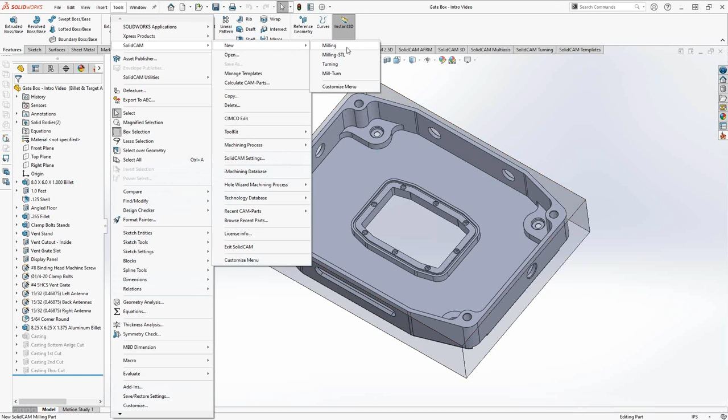If you are doing any kind of turning or mill turn part, then look in the rest of the series of videos for the new turning or mill turn part setup. So let's click on milling.

What this will do is bring up our first window from SolidCAM on the left side, where we're choosing between external and internal. Now, these settings here are defaulted according to our SolidCAM settings, which was covered in a previous video in this series.

So external versus internal - essentially what you're doing here is telling SolidCAM what your relationship with the original SOLIDWORKS part file is going to be.

So if we selected internal, what we're actually doing is adding a folder to this SolidWorks part. It's still the same file we're working in, the original SolidWorks part file, but we're adding a folder to the feature tree that would have all our tool definitions, operation definitions, everything to do with the actual programming side of things.

And the purpose of the internal option is really just for file management. If you've got a Vault software or PDM or anything like that where you are checking files in and out of some sort of network location, or maybe you just have a simple network and want to control just one file internally without some sort of third-party program, then internal is essentially for that purpose.

It really just allows you to do the design and the program in one file, and you can move that file around wherever you need to. That does mean that anyone who uses SOLIDWORKS can open up that same file, but if they don't have SolidCAM, then they won't be able to look at the programming side of things.

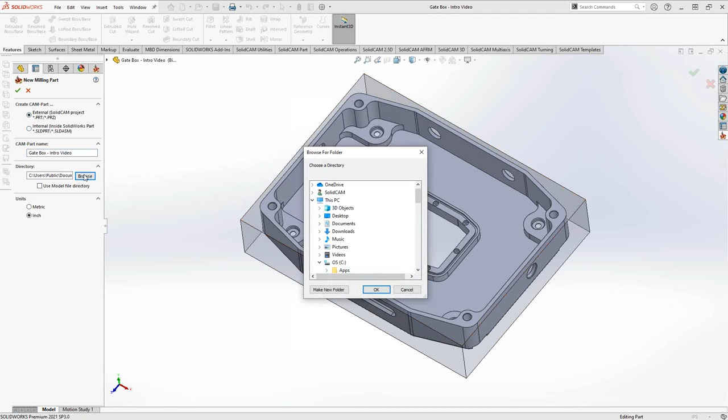If I want to skip the step of having to find where the original SolidWorks model was, I could just check this box here, which is why I had it defaulted, and it saves the SolidCAM file side by side with the SolidWorks file. That eliminates the need to browse to where I found that file. If I want those two files to be side by side, let's say in a job folder or something like that, this gives me the ability to just skip the step and say put it wherever I found it from the original SolidWorks model.

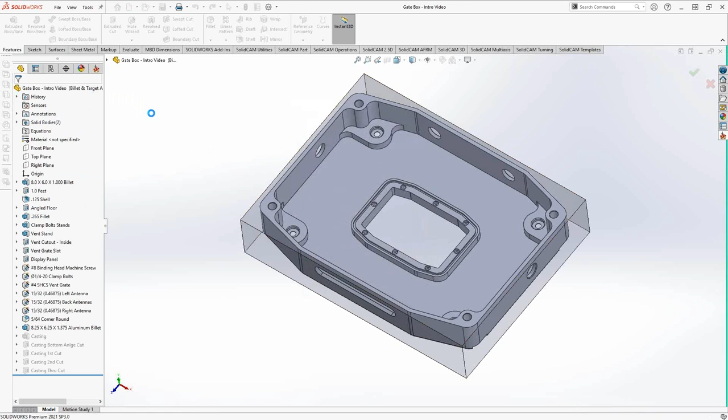And then lastly, it defaults to inch units, but it wouldn't matter if the original model was in metric. Once you open up a SolidCAM external file, you work in the units that you'd like to work in. So I'm just going to click the green check mark, and what will happen is it'll close this original SolidWorks model and open up a copy of that model inside of this new assembly. So essentially, you'll see that we're not actually leaving SolidWorks, we're just opening up a new file. This is technically a SolidCAM file, but because the functionality is the same as SolidWorks, it really doesn't look like we left SolidWorks. We're just opening it up inside of SolidCAM, which is inside of SolidWorks.

Okay, so before we get into this window here, I'll show you the feature tree. We are now inside of an assembly file, relabeled with the name that I took from the original SolidWorks model. In this case, because I toggled between the 'use model file directory' option and such, it reverted back to that -1. But if I had already just decided what address I wanted to put it in, it would have kept my initials. So this being an assembly file, you can see that it has the same name as the original SolidWorks file, but in the assembly we have a design model, which is just the relabeled copy of that original SolidWorks model. This gives me the ability to go in here and make design changes. These design changes will not be seen by the original SolidWorks model, so that associativity I mentioned really only goes from the original model into SolidCAM.

Any changes you make to this design model within SolidCAM don't go back and update the original model. This maintains that functionality of only the designer being allowed to make those changes to the original model. The only changes you would make here would be whatever makes it more machinable.

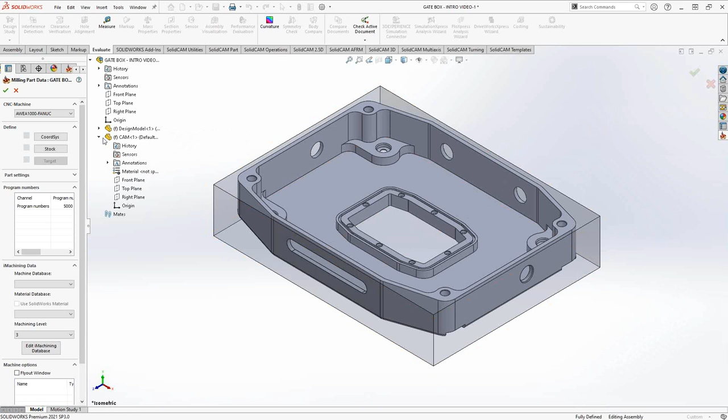So if there's some geometry or a sketch or anything like that you're adding to help with the programming of your part that you'd like to retain, regardless of changes to the original model, you can put it under CAM. This is a component added to this assembly just so you have somewhere to put stuff that is not associative. That's why in this CAM solid here, there's nothing in here, just the planes and the origin.

Let me just minimize that. So on the left side is actually your first window from SolidCAM. This is going to be the definition of the machine, the material, the coordinate systems. This is everything to do with the programming side of things, and this is the main focus of this video. So the first thing we're going to do is choose our post processor.

The defaulted one here, the one that automatically was selected, was detailed in one of our original videos, the global settings video. But let's say I don't want to work on this machine today, I want to work on one of my other machines. All I have to do is go to the pull-down menu and select the machine I'd like to work on today.

So in terms of milling, I'm probably going to work with my Haas SS. I just need to find that Haas SS post-processor. You can see that there are many post-processors that either come with the software or that I myself have collected over the years. Essentially all I'm doing here is grabbing a Haas post-processor. So let's just grab the VF4SS.

The post-processor that you select dictates what you're able to do within the SolidCAM file. So in this case, I'm choosing a VF4. I'm going to have feeds and speeds appropriate for this machine, maximum travels appropriate for this machine, and it actually happens to be a 5-axis post, indicated by the 5X.

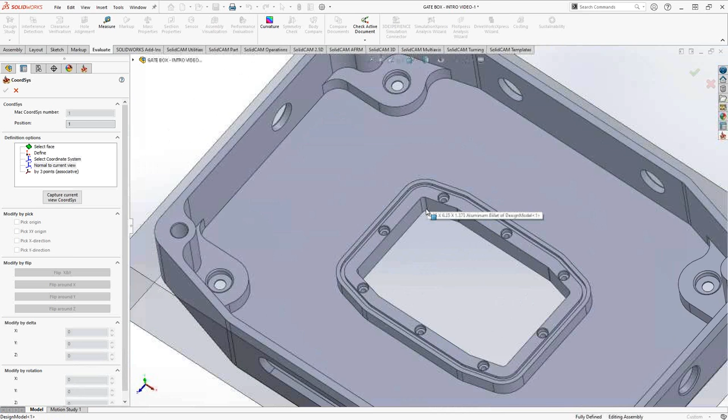Normal to current view is more for 5-axis. All it's really allowing me to do is eyeball my part. So let's say I wanted to deburr an edge, and this point of view on screen is exactly the point of view I want for the tool. I can click on Capture Current View, and essentially it makes the Z positive axis come out of the screen, the X positive axis go to the right of the screen, and the Y positive axis go to the top of the screen.

This again would be for those index positions, MAC1 position 2, MAC1 position 3. The reason being is it defaults to the origin of whatever I've set up as my setup axis. So if I set up those MAC1 position 1s a second ago, that would be my origin for this index position here. So really only for 5-axis work, but it's very helpful if you don't know what angle the part should be at to achieve that coordinate system, to achieve that operation.

Select coordinate system opens up this menu, currently blank, because it brings in any coordinate systems that were defined within SolidWorks. So if inside SolidWorks you had defined a coordinate system that was center of mass or a location based off an assembly, if you've defined a coordinate system inside SolidWorks that you'd like to translate to a SolidCAM coordinate system, you can do so with this option. The SolidWorks coordinate system on the bottom no longer gets used once you add your SolidCAM coordinate system. Once you do that, everything's referencing the SolidCAM coordinate system for feeds and speeds, directions, which way is up. All that stuff is related to the SolidCAM coordinate system.

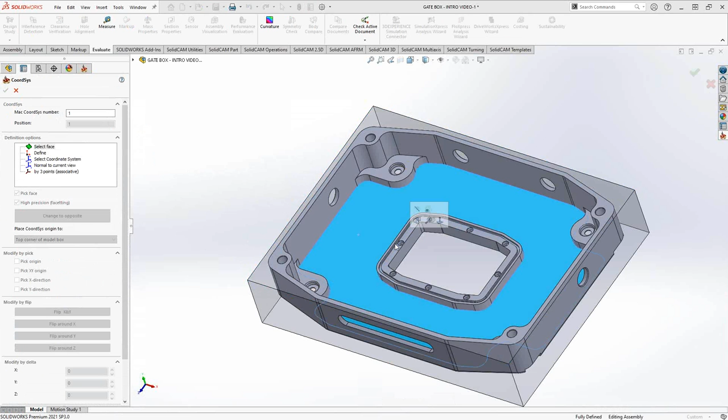What I'm going to do here is choose the top face, or any face of my solid that's facing in this direction. I'll click on select others and choose the face of my target. So I'm just choosing any horizontal face in the direction of the top of the part, and it places Z equals 0 on the very top face of my part.

You can see it actually found the tangent edges, or the outermost edges, of that model. Each line represents an edge of the box. So this right here is tangent, or in line with, that face and that face. This line represents the interface of those two faces. And these points exist at the center of each edge and also the center of each face.

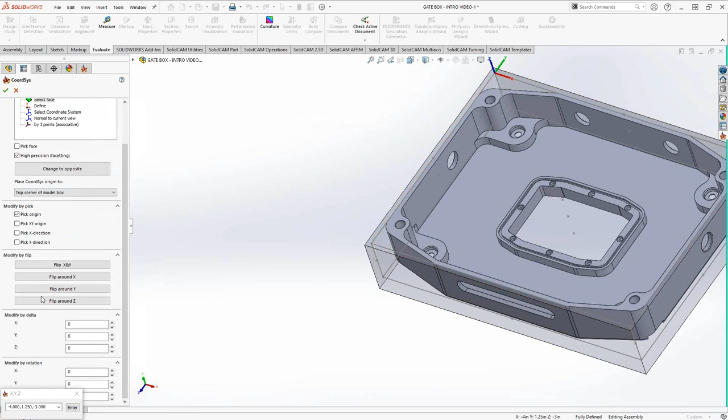Again, in case I might want to locate my origin somewhere else, if I didn't put it in the place I want with the first click, I can always go to pick origin and move it to another origin completely. If I still don't like where that is, I can move it around using one of the options at the bottom. So if I put it on that face but the x-axis is actually 90 degrees to where it should be, I could do a flip around Z and get the x pointing in that direction.

If it's not even in that corner, and it's somewhere else completely, I can use modify by delta to move it out. Let's say it should have been a half inch in x and a half inch in y, and that moves it out in its coordinate system. So that was in x, and that was in y.

Again, this is really just to set up the coordinate system that you'll reference when you do all of your toolpaths. The reason we get you to do the coordinate system first, before you even define the stock, is because all you need to define a SolidCAM file is the post and the coordinate system. So if you don't have stock defined, you don't necessarily need it for most of our toolpaths. The 2.5D toolpaths, as long as you're not using any kind of recognition functionality, don't require a stock and target definition.

Talking about stock and target definition, let's take a look at that next. So we have our coordinate system, we have our post. Like I said, at minimum that's all we need to get going. We can do all of the basic toolpaths we need with just Mac 1 position 1 and our coordinate system defined.

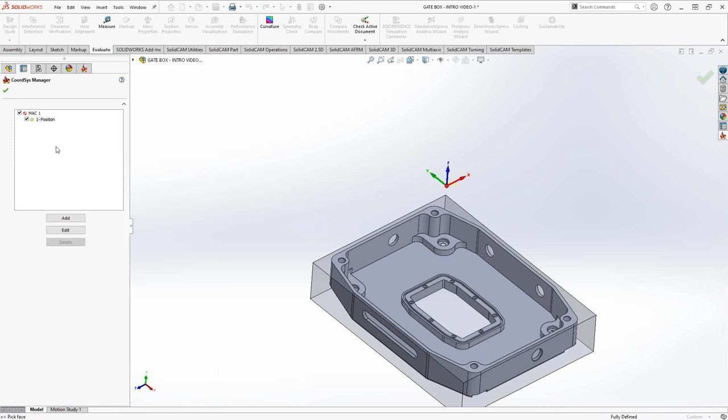As soon as you click on it, it brings you to this coordinate system manager screen. I can add as many coordinate systems to this file as I like. So for instance, let's say I'm eventually going to do a side 2. I can just click on add. I'll use a different offset for that, only because I need to tell SolidCAM we're coming from a different direction. So I'm going to make this a Mac 2 position 1, which will output as the second offset on my machine. In this case, it'll be G55.

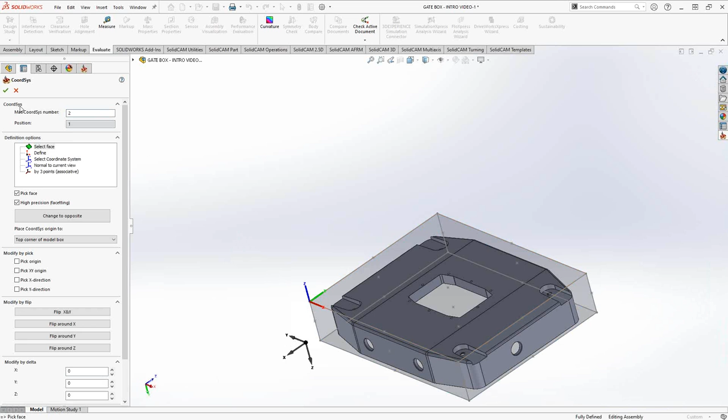I'm going to set this to top corner model box, and I'll literally click on the face of the stock here to get it to be the top corner. So in one part file, I'm telling it that there are two sides to this part that I'm going to machine.

That allows me to retain the updated stock from one side to the other. So if I'm using any kind of recognition toolpath, it'll see the amount of material that was removed from side 1 and know that material has been removed when I do any kind of recognition on side 2.

So let's define the stock. In terms of stock definition, there are multiple options. Under Define By, we'll see that there are 5.

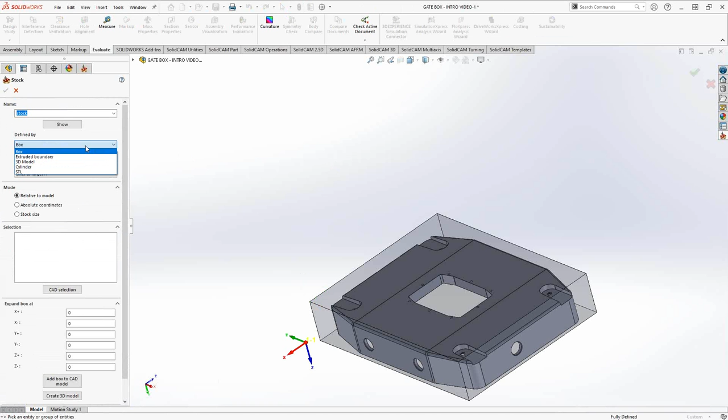We'll start with the box. The box is the easiest one. Basically, with the box definition, it places a default box - length, width, and height - around whatever model you choose. In my model, I have a stock solid and the original solid, so I'm just going to click on the original solid for now. I'm going to use Select Other just to grab that face, to differentiate between the 3D model I brought in and the stock I'm actually going to define in this window.

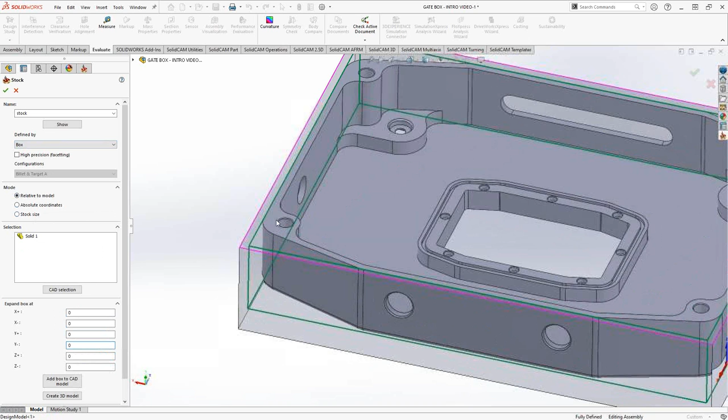When you use the box definition, there are 3 modes you can use: relative to model, absolute coordinates, and stock size. Relative to model asks you to choose the solid you want to put a box around, and then asks for the incremental amount of material you'd like to put on each face. In this case, I have it set to 0s, meaning I'm not adding any material to that green square around my part. So this is on size on all faces, even in Z.

If you don't know the size of your stock, this is a good option, because you can just tell it roughly to have it on size, or if I change these values - let's say in the X direction, I'm going to put 100 thou on all sides. As soon as you see me plug that number in, it updates the solid to have material in the X direction on both sides.

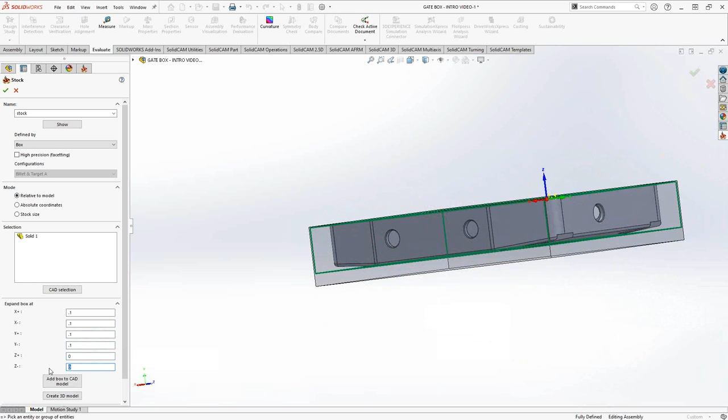Let's do it in the Y direction, so there's 100 thou in the Y direction on all sides. And in Z, I can add material on the bottom as well - let's say in the negative Z direction we'll put 250. So essentially, it expands that box around the solid - it's relative to the solid stock size.

If I go to absolute coordinates, you can see now it's not asking me for the solid. It's actually going to give me the ability to define the stock size itself, centered around, or at least referencing, that coordinate system. Right now we're looking at a 4x4 cube centered on my Mac 1 position 1. The only reason it's centered is because by default in my settings I have it set to that.

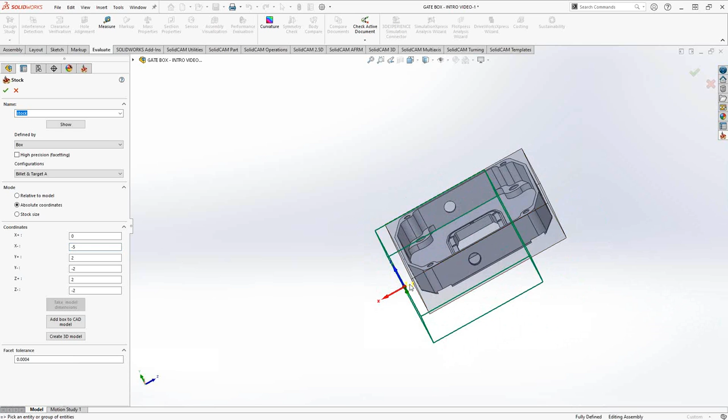But if I like, I can change that so it's, let's say, 5 in the X negative direction - so let's say -5. In the positive X direction, we're not doing any material, so let's put 0. You can see it shifts so that it's 0 to 5 inches in that coordinate system. These are actual coordinates I'm plugging in here. So the outermost edge in Y would be, let's say, 0 in the positive and -10 in the Y.

And again, we're starting to shape it. So this is not related to the solid - this is just your actual model size.

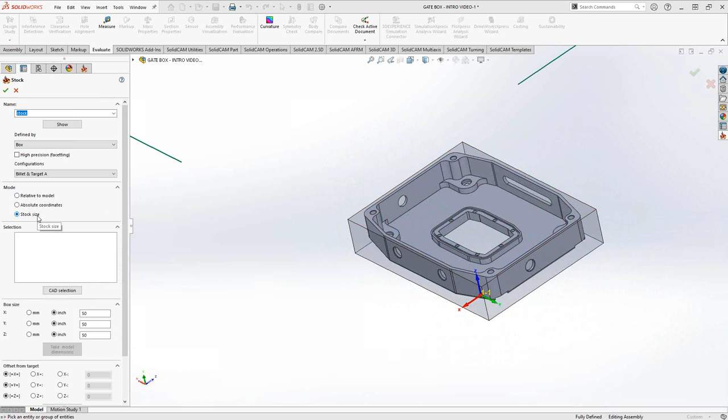If we go to stock size, this is an even easier option to use, because this is going to allow you to do basically the combination of the two. If I select my actual final solid - let's say I do a Select Other and grab that face - as soon as I click on the solid, it gives me the minimum box size for that solid. In this case, I can tell I will need a 6x8x1.25 stock size.

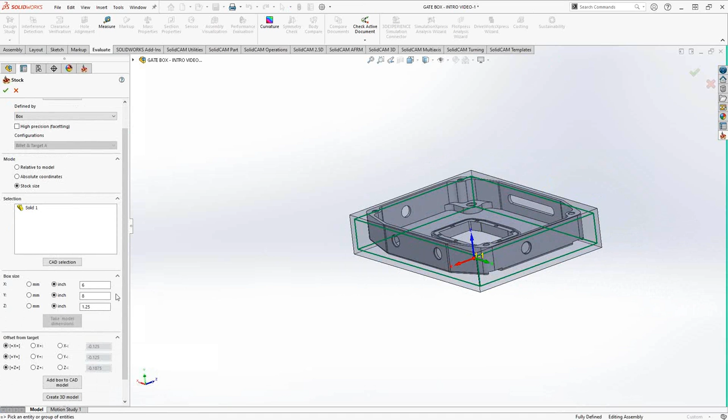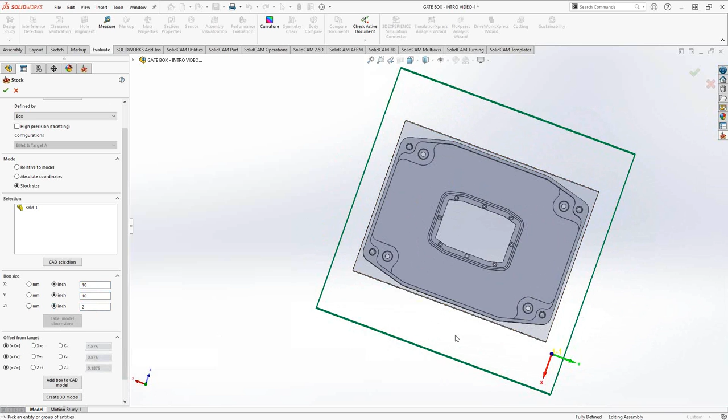Now, let's say that's not the stock I actually have. I have something that's probably more like 10 by 10 by, maybe not 20, by 2. What this will now do is center it inside that stock. So if we look at it from the XY plane, it's actually centered in those dimensions. And in Z, it does the same.

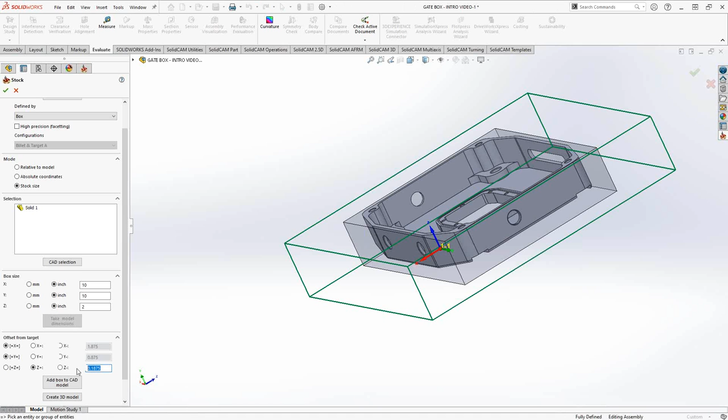But obviously, I'm not going to want to center a 1 1/4 thick part in a 2-inch part. I'm probably looking to do only maybe the first 10 thou on the top and have the remainder on the bottom. So in the offset from target section, I can give it those values - from the Z positive side of the part, rather than having it centered, I'll say I only want the first 10 thou. That shifts the solid so we have the 10 thou on the top, and the remainder from the bottom of the target.

So that is using the box definition. When you choose a solid, it places the box around it based on one of those modes.

Cylinder works in a similar way for the turning operations. We'll see that when we review turning and mill turn in the setup for turning.

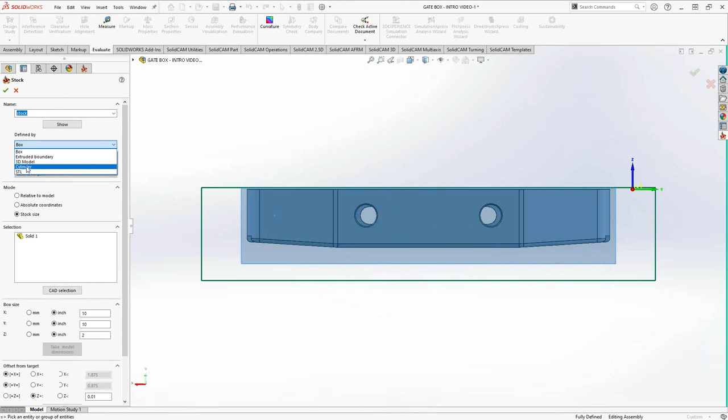But for all modes of SolidCAM, you have the ability to do extruded boundary. In this case, if we switch to extruded boundary, this allows us to choose a chain that gets extruded in the Z direction. I'll choose just the top edge of my target, turn on constant Z to go all the way around, and that will give me an extruded solid based off that profile. It extrudes it in the Z direction that I've defined.

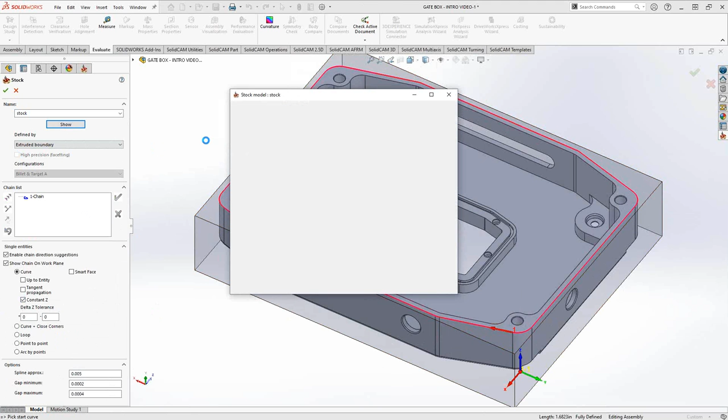This is useful when you have a wire cut, laser jet, or water jet cut part where you aren't really machining the outside, but you want to have that general shape in the prismatic direction, in the Z direction. That's helpful if you have some sort of silhouette part.

3D model goes even further. It allows me to choose a solid we have on screen. For instance, with this part file that I brought in, I actually have a 3D model that represents my stock. So I'll just click on that, and that defines my stock going forward. This is actually an associative solid, so as soon as I do this 3D model definition, it'll always track that solid. And if I have a different size of stock, I can update that 3D model, which will update my stock definition, which will update any kind of 3D recognition toolpaths that I have.

And then finally, we have the STL option here as well. What STL asks us to do is browse to an STL file of the updated stock. STL being a third-party format, all we're really doing here is outputting updated stock from another part file to be used here. A good example would be if you've done a part on one machine, and now you need to take that updated stock to another machine, and you don't want to lose the information contained in that part file. Rather than trying to program everything in one file, or if you are changing machines and changing the post-processor in use, you can generate an STL file and bring it into this file for use as a stock definition.